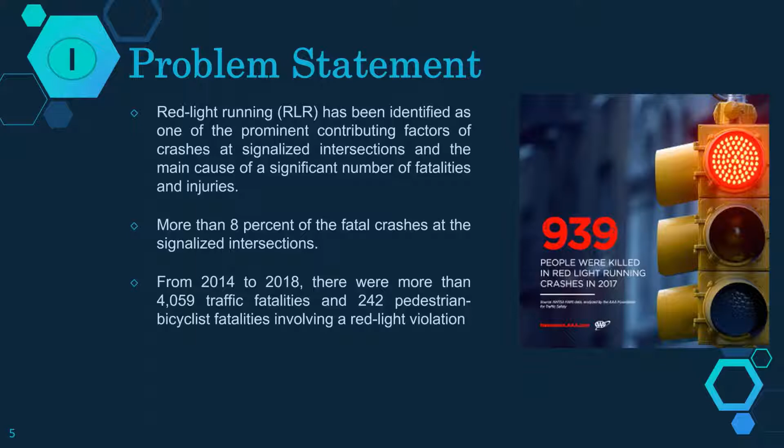One contributing factor to these crashes and violations is the existence of uncertainty as drivers approach what has been termed the dilemma zone. This zone is where drivers are uncertain whether to stop or advance to clear the intersection successfully during yellow light. Drivers' uncertainty in a dilemma zone may result in rear-end collisions because of sudden brakes, or red light running violations followed by right-angle collisions.

A potential solution to this problem, which is the focus of our study, is the connected vehicle red light violation warning application. This application is expected to reduce crashes between red light runners and cross traffic by increasing drivers' awareness of the signal status as they approach a signalized intersection, which will reduce the uncertainty in the driver's behavior, particularly in the vicinity of the dilemma zone.

So how does this application work? Basically, the vehicle onboard equipment of the red light violation warning application receives signal timing and map data from the roadside equipment. Combining this information with vehicle-specific information, such as speed and distance to the stop bar, the application assesses the probability of the driver violating an upcoming red light. According to this probability, the onboard equipment sends messages in the form of either advisory alerts or warnings to assist the driver in making the correct decision in the dilemma zone and avoid the red light.

In order to study the benefits of this application through simulation, correct calibration is key to accurate simulation. One main parameter in modeling and simulating the red light violation warning application is the driver's behavior in the dilemma zone, characterized by the probability of either stopping or going at the instance of the yellow light. So one main goal of our study is to calibrate this driver's behavior and showcase the impact of calibration on the validity of the red light violation warning simulation results.

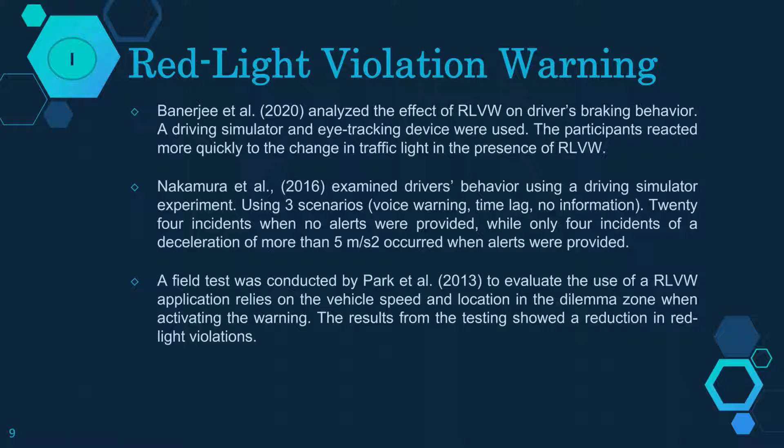Another type of study we looked into was real-world driver's behavior regarding the probability of stopping and the travel time to the intersection measured at the start of yellow time. There are a couple of studies on this particular topic, and the most recent one we found was done by Gates in 2007. This study basically updated the two models proposed by Sheffi and Mahmassani in 1981, and another study by van der Horst and Wilmink in 1986.

We will talk about what those parameters are. One of our objectives, as Kamar was saying, is to get the model ready to assess the safety impact or the mobility impact of the red light violation warning application, and then how we coded this red light violation warning application in the simulation.

So this is the logistic model in VISSIM. It determines the probability that a vehicle will stop at an amber light.

So in the driver behavior, particularly in signal control behavior, there's a behavior related to the amber indication, how the vehicle reacted to the onset of the yellow signal.

As you can see, there are three parameters here that we calibrated, which are alpha, beta 1, and beta 2, and two important variables in this logistic equation are the vehicle speed and also distance to the intersection measured from the vehicle.

So in short, by using the default values of these three parameters, alpha, beta 1, and beta 2, the resulting red light running violations will be 0. That's why this is also the first objective of the study, is that we want to calibrate these three parameters based on the real world probability of stopping data that we have.

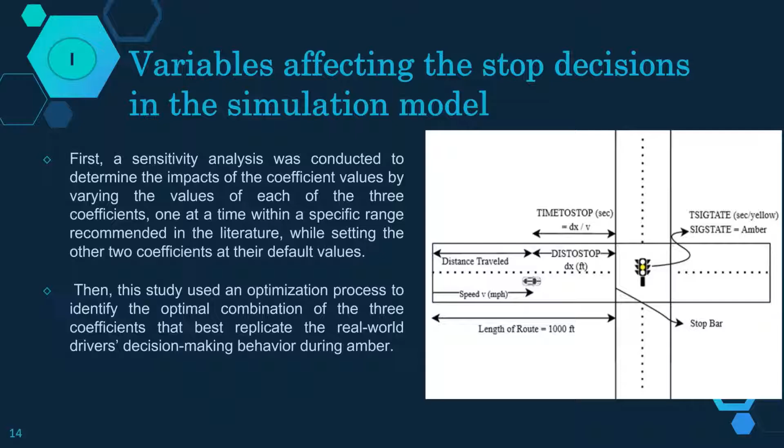It would be best if we have the local data available, but the purpose of this study is to show the framework of the calibration, how if one wants to assess the impact of this application, how can you start. This is the framework that we want to stand up. Next, please.

Again, basically we adopted the probability of stopping that was done by Gates study here. Next, please.

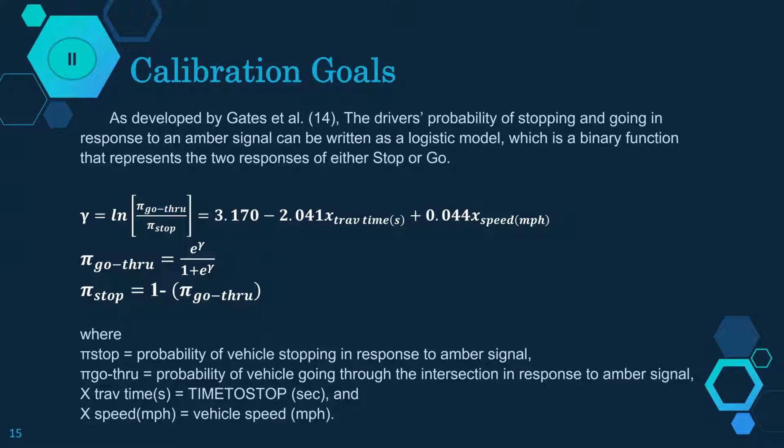Then, in order to find the best combination of those three parameters, we use nonlinear programming to optimize and solve the problem. Next, please.

And this is the algorithm that we coded in VISSIM. In short, basically this algorithm begins when it continues to check the signal status in VISSIM. In the real world, that would require SPaT data. So it begins when the remaining green time is less than 5 seconds.

This is just to make sure that some of the vehicles, if they are in the dilemma zone within 5 seconds, they can clear the intersection safely. And also if the remaining amber time is higher than 0, that means the current signal time is amber.

This application will check whether the vehicle is in the communication range. If yes, then the approaching speed and distance to the stop bar will be measured. Then the algorithm will compute the time to clear the intersection of the vehicle.

If the time to clear the intersection is higher than the remaining amber time, and also if that vehicle is in the dilemma zone, a warning message will be sent to that driver to notify them about the potential of running the red light.

Then Mahmoud will be talking about the results that we studied.

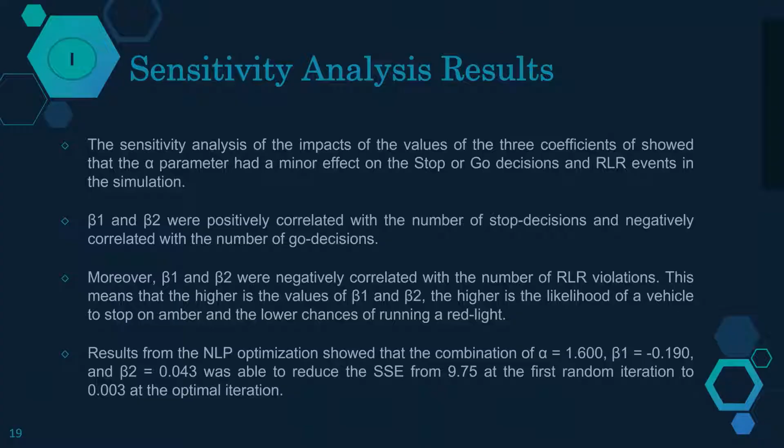After we obtained the combination of alpha, beta 1, and beta 2, we were able to reduce the sum square error from 9.75 to 0.003 at the optimal iteration. This means VISSIM was successfully able to simulate, nearly 99.7% accurately, a real world probability of drivers stopping on amber.

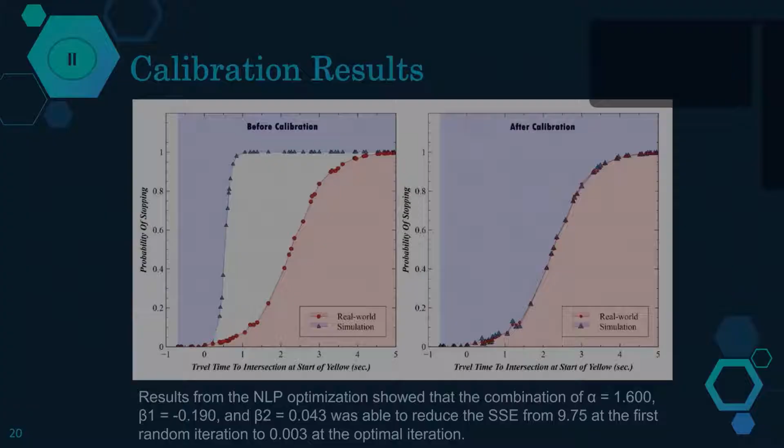So next, please, Kamar, could you go next? We used two surrogate safety measures: right angle conflicts and rear end conflicts, which are the two conflict types most highly impacted by a red light running application.

Those two types of crashes, right angle crashes and rear end crashes, are what we tested using the surrogate safety assessment.

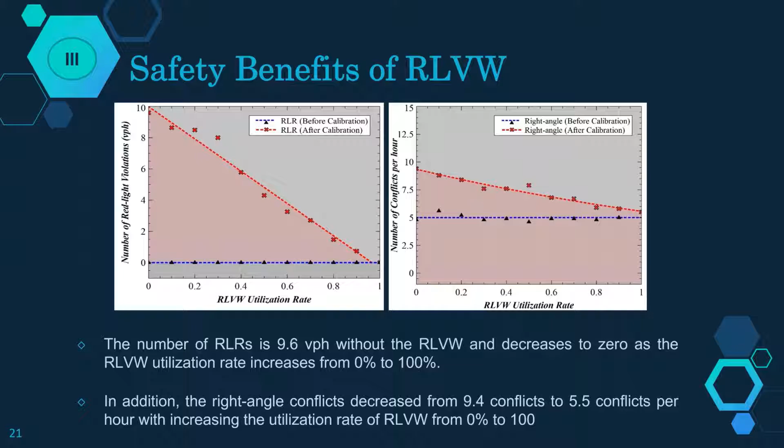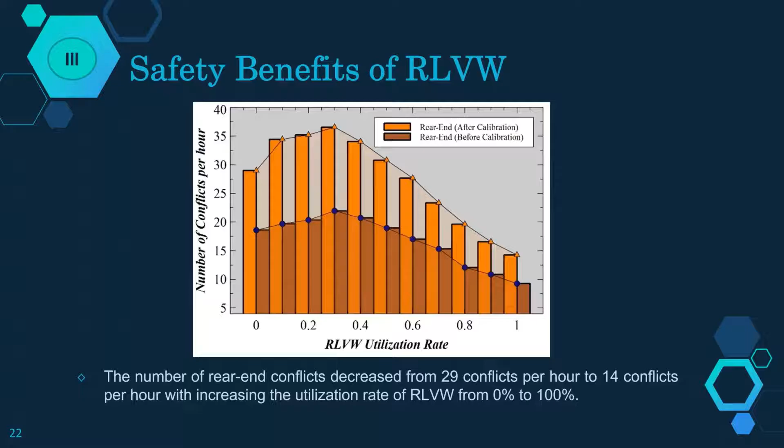With that, we'll turn to the next application: the stop sign gap assist application in a connected vehicle environment. I'll hand it to Kamar to introduce it. Thank you, Mahmoud. Similarly, I'll start with the problem statement.

A two-way stop-controlled intersection aims to improve traffic operations for the major street. Vehicles from the minor approach, who must yield to conflicting traffic, are allowed to enter the intersection once acceptable gaps are determined to be available by drivers on the minor approach.

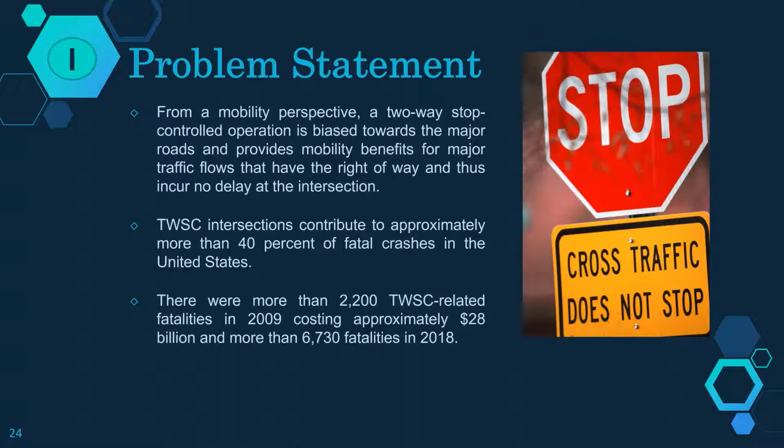However, two-way stop-controlled intersections contribute to more than 40% of fatal crashes. This is mainly attributed to drivers' misjudgment of the presence of a sufficient gap in conflicting traffic, failure to yield the right of way to the major road, and inadequate or obstructed sight distance.

A potential solution to this problem is the stop sign gap assist connected vehicle-based application. It is designed to provide assistance to drivers on a minor road and allow vehicles to safely traverse or enter a major approach.

This application supports drivers' crossing decisions by providing advisory messages, alerts, or warning messages to vehicles on the minor road with approaching vehicle information on the major road. Similar to other vehicle-to-infrastructure applications, previous studies reported that stop sign gap assist application can utilize two decision support interface alternatives: the driver infrastructure interface and in-vehicle interface.

The goal of our study is mainly to investigate the use of microscopic simulation models to quantify the potential benefits of a stop sign gap assist connected vehicle-based application, considering both mobility and safety impacts. We used VISSIM as a microscopic simulation tool to model the stop sign gap assist application and assess its impact on traffic performance at an unsignalized intersection.

Similarly to the red light violation warning application, we use the vehicle trajectories data output from VISSIM to evaluate the safety benefits based on the surrogate safety assessment model, which was also developed by FHWA.

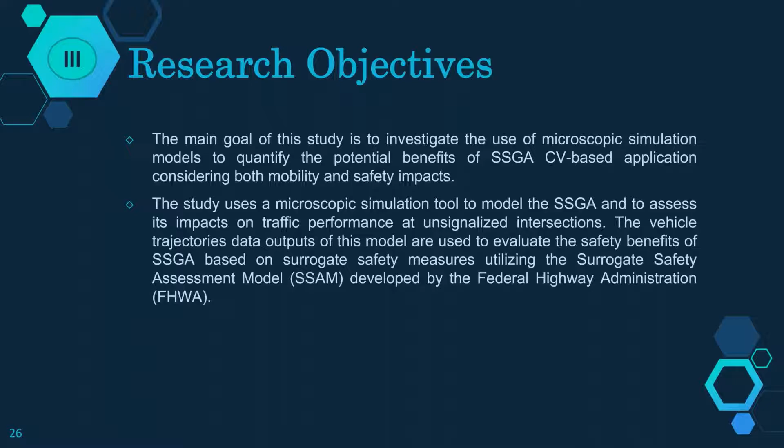Yes, sure. So the literature review that we went through was related to real-world drivers' behavior, particularly at stop control intersections, and also the previous studies on the assessment of the SSGA application. So, well, quickly that. Okay, next please.

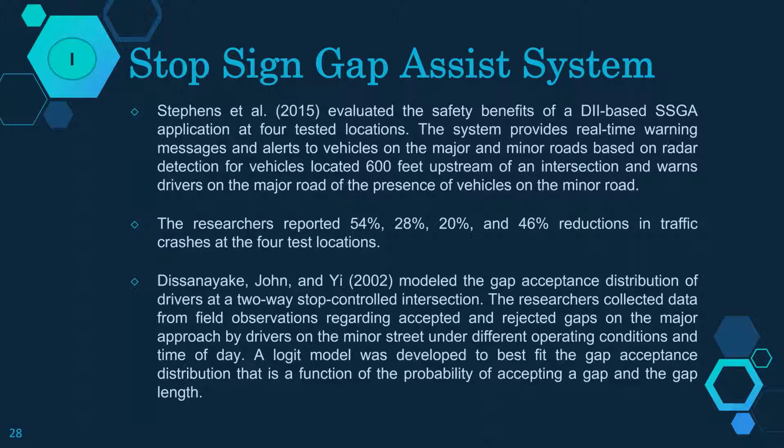This is the gap time distribution that was done by the study of Dissanayake, John, and Yi in 2002. Basically we adopted this model and then we calibrated this gap acceptance in VISSIM rather than using a constant value of gap time.

I think when one wants to assess the impact of this application, I mean SSGA, we want to see the importance of using this gap time distribution rather than a constant value. Next please.

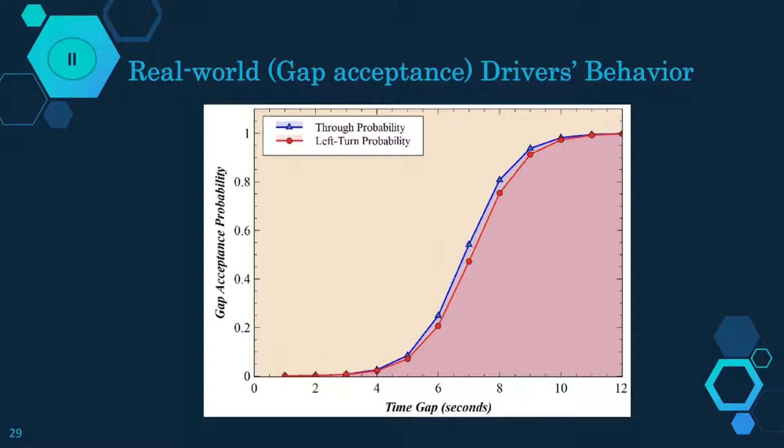So very quickly, next please. The intersection that we coded in VISSIM was a basic four-leg two-way stop control.

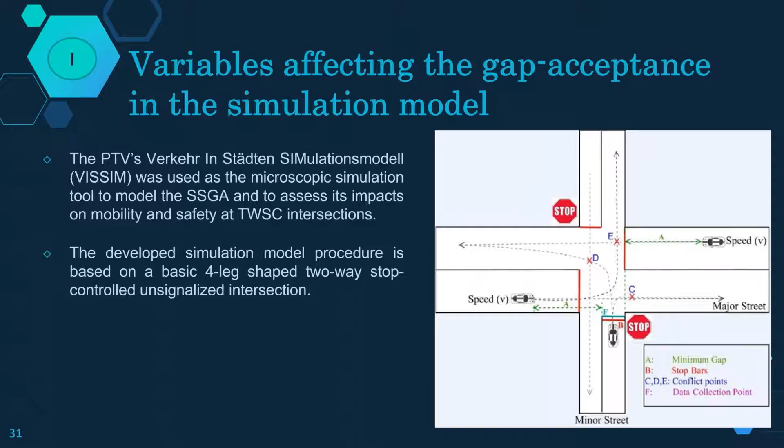And again, the model that we adopted was by this Ayanaki study. Next. Then this is the SSGA algorithm that we coded into VISSIM. Very quick, if anyone is interested, you can look at the paper because we're running out of time.

And then we further validated this model using the HCM, using the HCS software. As you could really see here, VISSIM is 100% able to replicate a real-world gap acceptance distribution. However, you need to model your correct parameters in the simulation. And going back again to the point that we started, VISSIM can give you a risk-free environment.

It can help transportation agencies in the pre-deployment and post-deployment of connected vehicles. You can use the simulation in a software-in-the-loop and hardware-in-the-loop setup. It gives you really a variety of scenarios that you can utilize the simulation package for. I don't want to sound like I'm making a commercial advertisement, but really I found the software very helpful in our studies.

So you could really see that before and after calibration, using the default 3 second gap time parameter in VISSIM, we overestimated the real world gap acceptance distribution. But once you input the distribution of the priority rules as a gap acceptance distribution instead of a constant parameter, you could achieve the real world driver's behavior.

This is the last slide. We will talk about the safety benefits of the application. We simulated the stop sign gap assist application, using 4.5 seconds as a design threshold that gives you an alert after a 4.5 second gap time, or 6 seconds, or 7 seconds, or 8 seconds. We modeled the 4 gap time thresholds in VISSIM, and we reported the safety benefits in terms of right angle conflicts.

You could really see that as the minimum gap time utilized in the simulation model increases, you will have fewer right angle conflicts. However, we found a trade-off. Here we are talking about two benefits of the application: safety benefits and mobility or capacity benefits.

If you input a time gap parameter less than 4.5 seconds, for example, you are releasing more vehicles into the intersection and creating more conflicts. However, you are increasing the capacity of the minor road. But if you increase the gap time parameter to 7 or 8 seconds, you improve the safety of the intersection, but you decrease the capacity on the minor road.

You could really see the number of right angle conflicts fluctuates from 11 to 16 conflicts when we used opposing traffic from 250 vehicles per hour to 500 vehicles per hour. However, once you have a higher flow rate of opposing traffic at 750 vehicles per hour, the number of conflicts increases with the utilization rate, again due to the assumption that more conservative drivers will utilize the service and use shorter gaps.

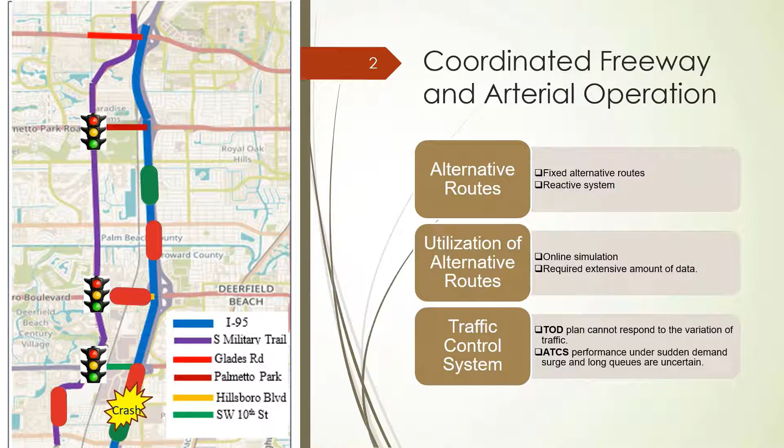Our solution includes basically three main methods. One is prediction of the scenarios on alternative routes - what kind of scenarios occur in alternative routes when traffic starts diverting, using machine learning and clustering analysis.

The second one is estimation of the effect of traffic demand on alternative routes. For this, we use multi-resolution modeling, which includes three parts: macroscopic, mesoscopic, and microscopic simulation modeling, to estimate the traffic demand on alternative routes.

Finally, after identifying the scenarios, for all the scenarios we developed a special signal plan so that it can address all these demands, while at the same time not deteriorating the overall performance of the network. To do this, we use multi-objective optimization, and here we use the VISSIM-COM interface to develop the signal plan.

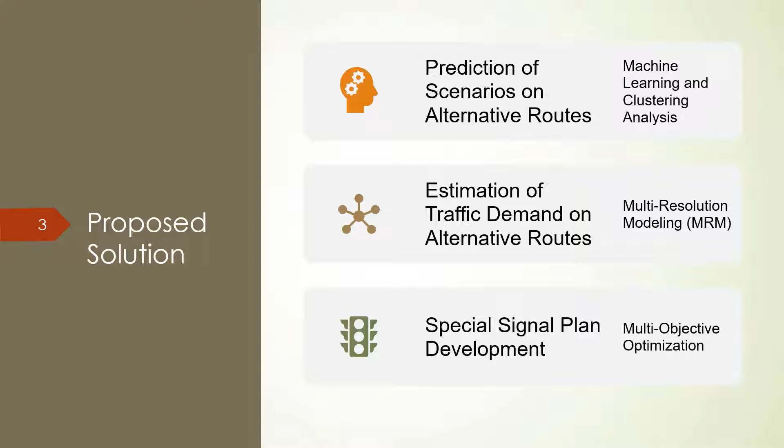One important aspect of our study is the multi-resolution modeling framework I previously mentioned. In this framework, we use Cube software, and then PTV VISSIM. In our case study in South Florida, the planning model was developed using the software Cube.

We developed this in Cube software. We need to extract the sub-area as well as the OD matrix from the planning model. Initially, for this sub-area and OD matrix, we ran the highway assignment module of Cube to get the OD matrix for this sub-area.

Thanks to the PTV group, PTV VISUM has the ability to import data from the Cube software. So after running the highway assignment module in Cube, we imported the OD matrix data and the network into the VISUM platform, the PTV VISUM platform, to run the mesoscopic simulation model.

We need the mesoscopic simulation model especially to address new features - the simulation-based assignment available in PTV VISUM. In VISUM we use simulation-based dynamic assignment because it has the ability to address dynamic phenomena in the network.

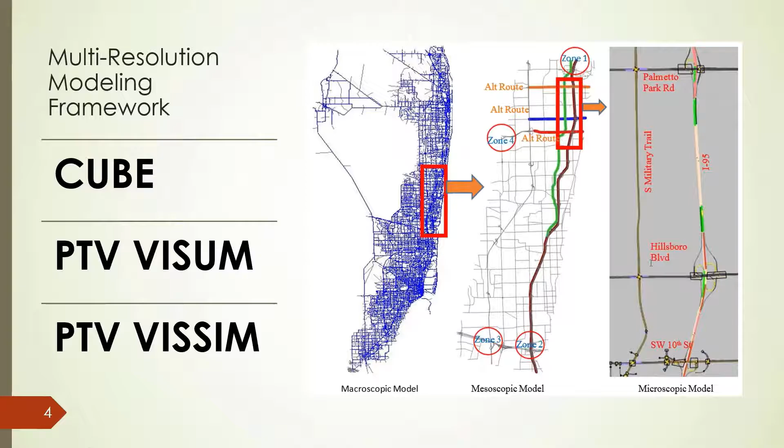So one of the challenging parts is the calibration of the SBA model, which we did for both the normal condition and the incident condition. For both conditions, we use data from the street light data for the OD path-based traffic, as well as the travel time for both normal and incident conditions. We also calculated the reduced traffic count data and the turning data.

After getting all this data, we calibrated the SBA model for the normal condition using the criteria set by the Federal Highway Administration, which requires traffic count and travel time error to be less than 15%. When we saw this criteria was met for the normal condition, we then calibrated the model for the incident condition.

For the incident condition, we put in the lane blockage and incident duration on the freeway, so that traffic starts diverting. To do this in SBA, it's not possible to directly reduce the capacity, so we use the time headway, critical gap time, and reaction time, changing these so that the capacity comes as close as possible to the HCM capacity for different incident conditions, like 1 lane blockage or 2 lane blockage, comparing it to the HCM.

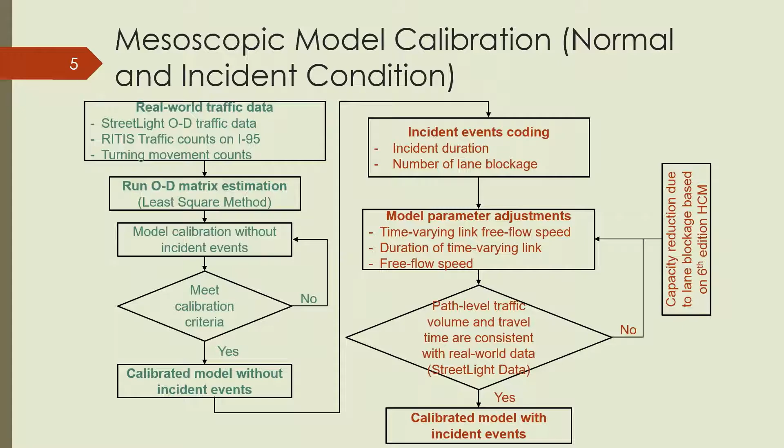After calibrating this model against the HCM, we ran the different scenarios. We came up with 11 scenarios total, but overall we developed the signal plan for 5 of those scenarios.

In the calibration results, this result is for the incident condition. You can see these 3 routes, which are very important for the diversion. For the travel time on these routes, it's less than 10%, meeting the criteria. For traffic counts, for the 2 to 3 lane blockage case, it's a bit higher than 15%, around 16%. But for all other cases, it satisfies the criteria.

After doing this calibration, we ran the DTA and got the route-level traffic demand for the different scenarios, then imported it into VISSIM for optimizing the signal plan.

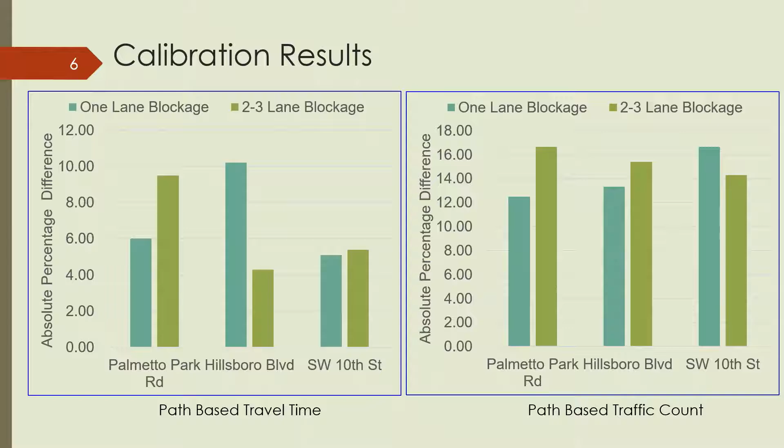For optimizing the signal plan in VISSIM, we used multi-objective optimization, and our main goal was to minimize the delay and maximize the throughput, both in the network and in the diversion route. So we try to minimize delay while also maximizing throughput in the network.

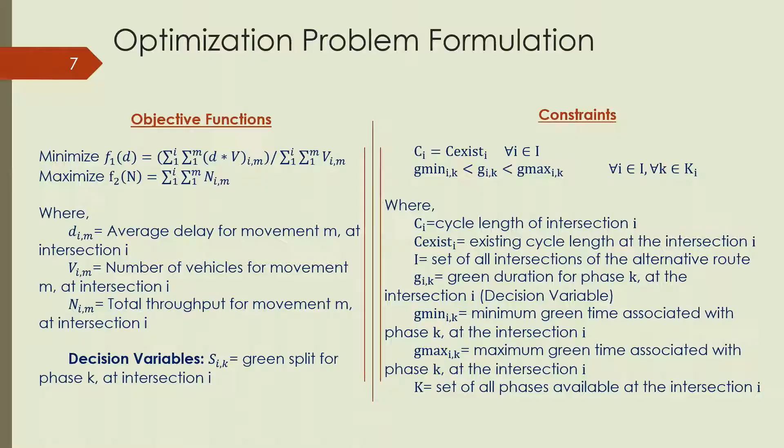For different signal plans, to solve this optimization problem, we used the NSGA-II multi-objective optimization algorithm, which is a variation of GA, the genetic algorithm. We used this algorithm together with the VISSIM-COM interface.

What we did was write the algorithm separately and run it through the COM interface to access the VISSIM simulation. After running the algorithm, that data was put back into VISSIM, which ran the simulation, and then we got the output from VISSIM and put it back into the algorithm again. So it's like a loop, and we continued this until our criteria were met.

After doing this optimization in VISSIM, we finally developed our plan. The results I showed are for the 5 scenarios, but overall, from our clustering analysis, we found there are 11 scenarios in total.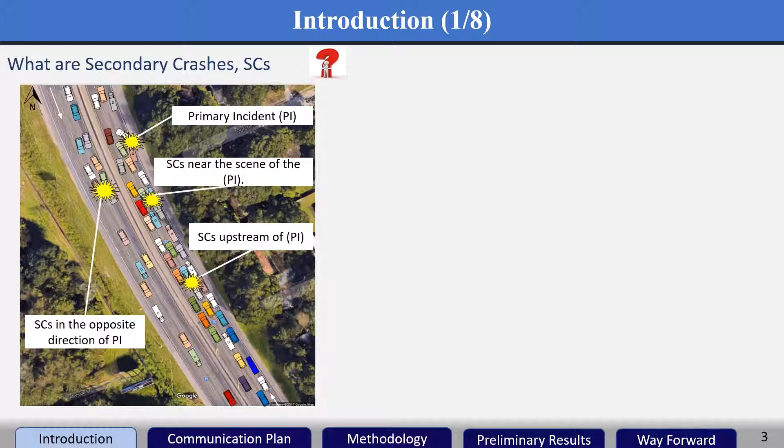So what are secondary crashes? Secondary crashes can simply be defined as any incident that is an outcome of a prior incident within the same vicinity of the prior incident. Secondary crashes can also occur on opposite traffic due to the rubbernecking phenomenon.

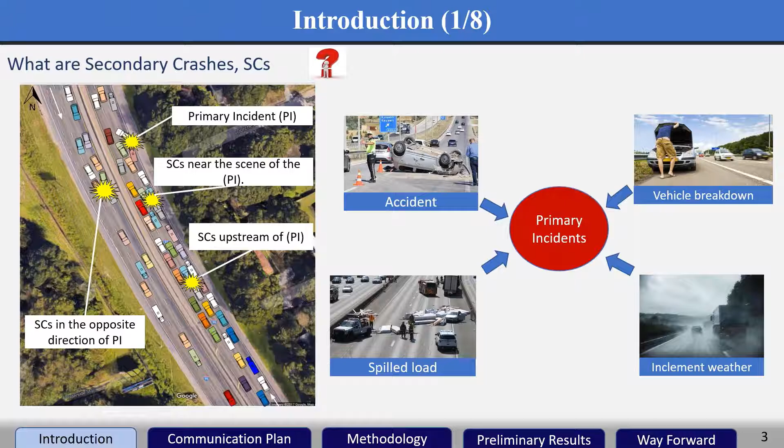Various road incidents may cause the occurrence of secondary crashes, such as road accidents, vehicle breakdown, spilled load or debris, and inclement weather.

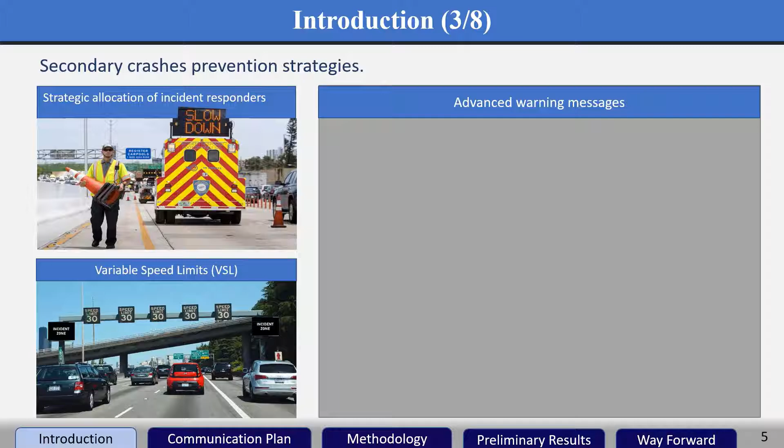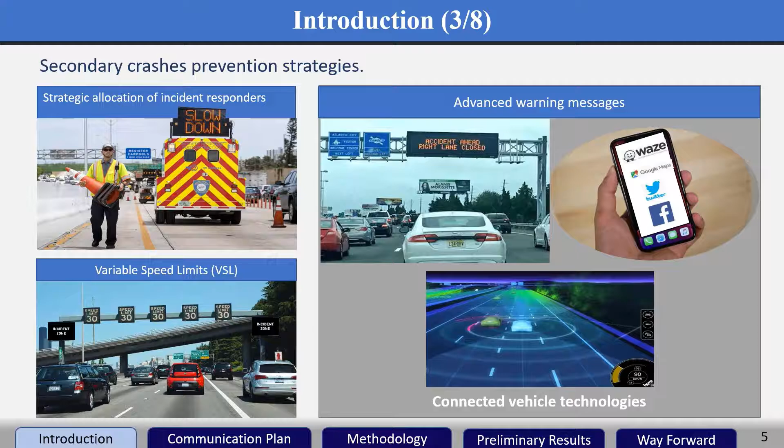Traffic incident management agencies have considered different strategies to prevent the occurrence of secondary crashes. For instance, strategic allocation of incident responders to hotspot locations, the use of variable speed limits, and advanced warning messages. Here you can see things like dynamic message signs and smartphone applications, also connected vehicle technologies, because these can disseminate incident warnings while at the same time suggesting the best actions for drivers to take.

So to mitigate secondary crashes, this is a time-sensitive process. If the crash has occurred, you have to be very quick to disseminate that information to upstream drivers so that you can prevent them from experiencing another accident as an outcome of the primary incident.

But with the methods I've mentioned before, there is a lapse of time between when the incident occurred and when upstream drivers get the information. This lapse of time may increase the likelihood of secondary crashes. On the other hand, the use of smartphone applications and connected vehicle technologies have potential to disseminate traffic information in real time, more quickly.

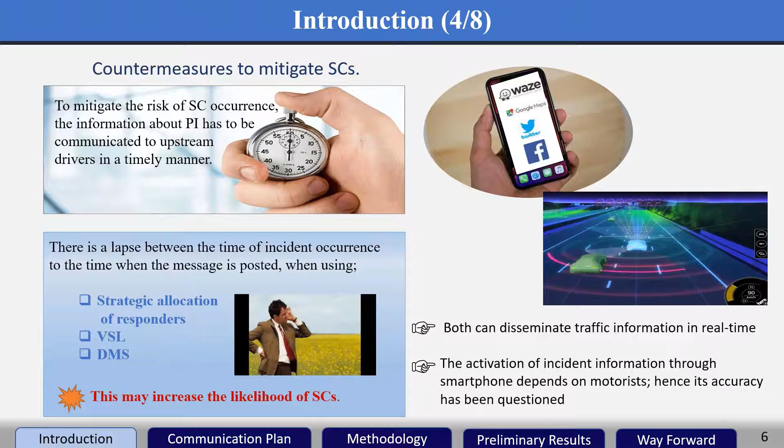So having seen the challenges of the aforementioned strategies, let's look at connected vehicle technologies. Connected vehicle technology, as we know, is just enhanced capabilities of vehicle-to-vehicle communication and vehicle-to-infrastructure communication.

Unlike other strategies, this technology has potential for slashing the delay in disseminating advanced messages to drivers when an incident occurs, through automatic incident detection and quick dissemination of incident-related information, which can help slash the delay in relaying information.

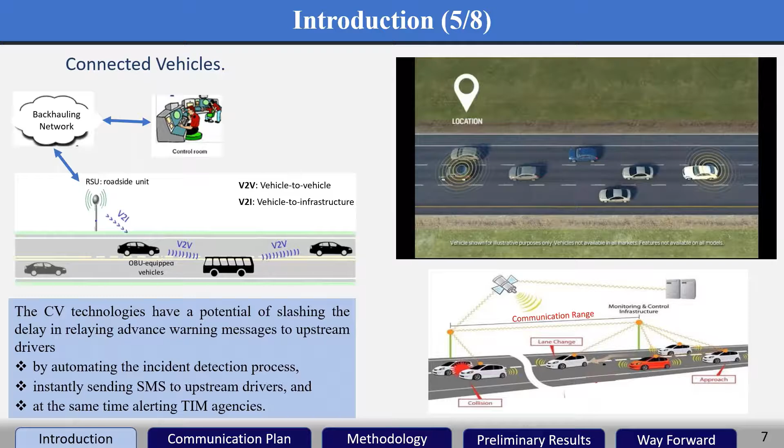This video clip shows an example of vehicle information that can be shared in a CV environment, including location, speed, direction, and advisory messages. This can be useful in mitigating secondary crashes by sending a notification, such as hard braking ahead, where a driver can reduce his or her speed, possibly to avoid the crash ahead.

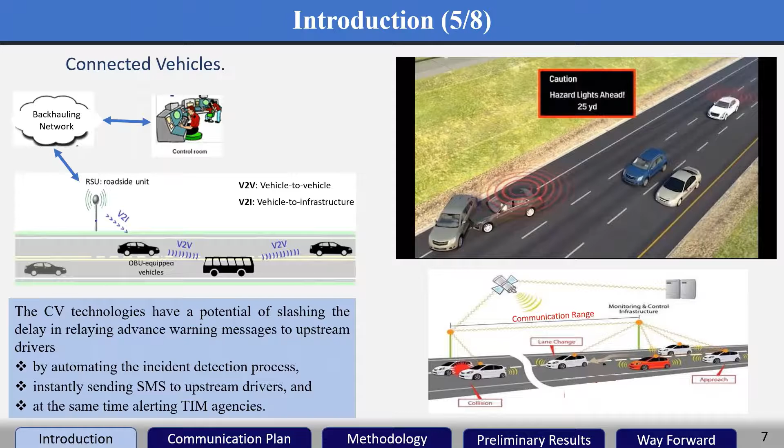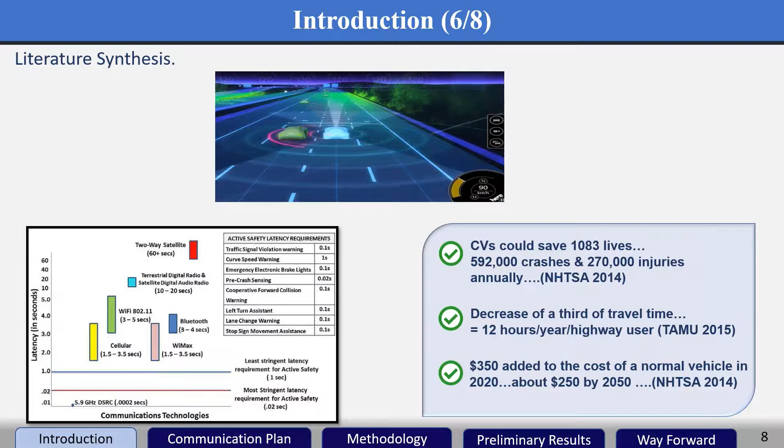Safety analysis observational models depend on historical crash data to assess the safety of a facility. On the other hand, we can use surrogate safety measures, such as traffic conflict analysis and microscopic simulations, as an alternative approach to observational models in situations where crash data are limited, or when evaluating the potential safety benefits of certain modifications before their implementation, for instance, CV deployment.

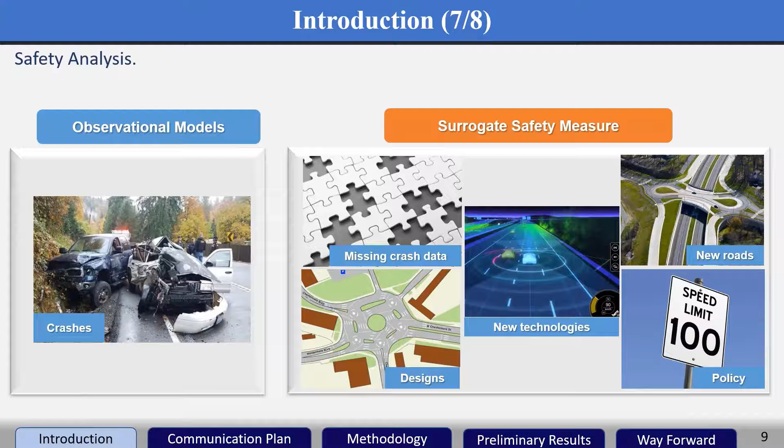So this is the main objective of my study: to quantify potential benefits of CV technologies at varying market penetration rates in mitigation of secondary crashes. Here I use traffic conflict analysis as a surrogate measure for secondary crashes.

So I have a communication plan that is needed for proper and efficient relaying of this primary incident information. This communication plan will reduce the risk of secondary crashes.

As we know, after incident occurrence, there should be incident detection, incident verification, and processing of information and advisory messages that need to be disseminated all the way to other motorists. This can be done through DMS and connected vehicle technology.

So I just used connected vehicle technology. As I showed you in the last slide, there are a couple of means to disseminate information, but in my case, I don't want to use DMS—I'm going to use CV.

Under a CV environment, information can be conveyed from detection all the way to motorists approaching the scene. This shows the potential of connected vehicle communication to quickly disseminate incident-related information, therefore reducing the likelihood of occurrence of secondary crashes.

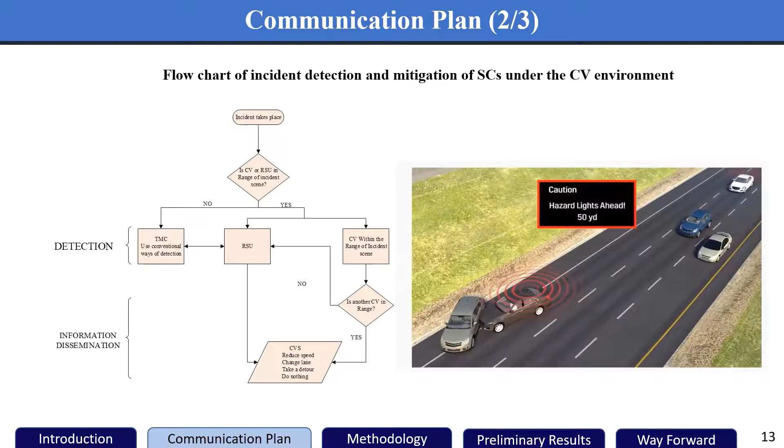This figure shows the algorithm that I developed, which was used to process advisory messages to be disseminated to motorists during an incident period. The algorithm's objective was to provide speed, lane change, and/or detour advisory messages to drivers upstream of an incident location, with the target of mitigating the occurrence of secondary crashes.

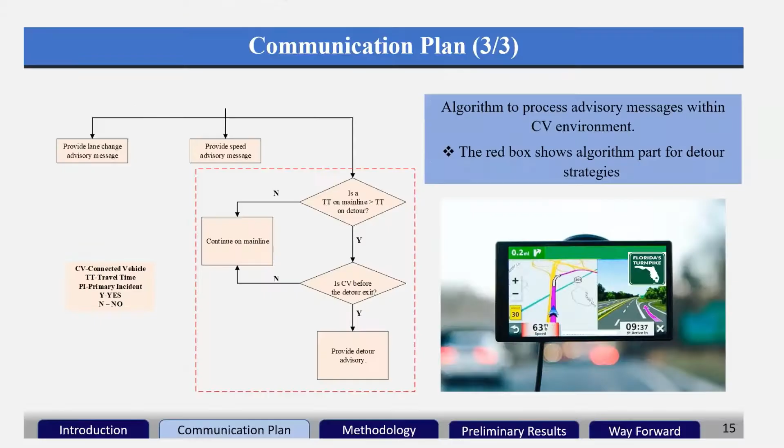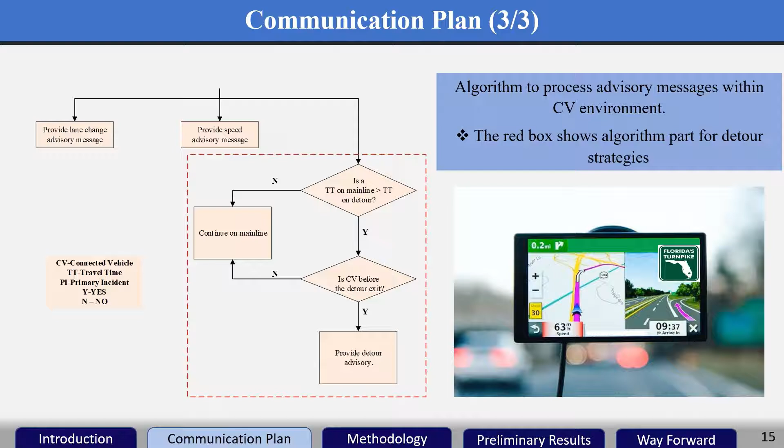The algorithm requires traffic parameters as input to come up with an appropriate advisory message. The red box here—this part of the algorithm—was used to enhance the detour advisory. Travel time was used as the performance measure, comparing travel time along the main route and the detour. Whenever the travel time along the detour was shorter compared to the main route, the connected vehicles were advised to consider that detour route.

So here's my methodology.

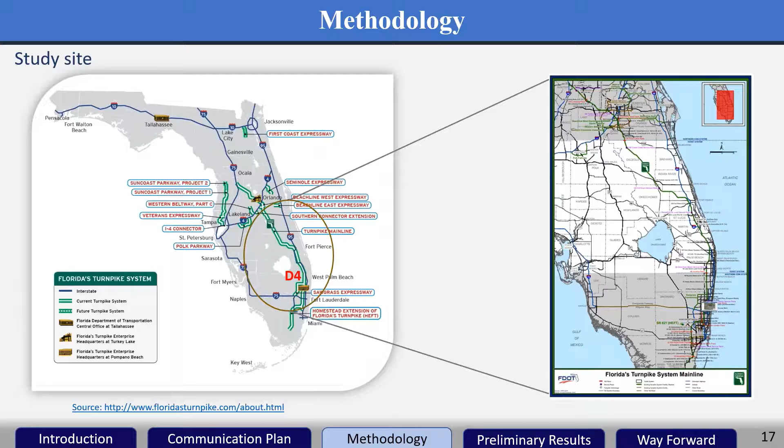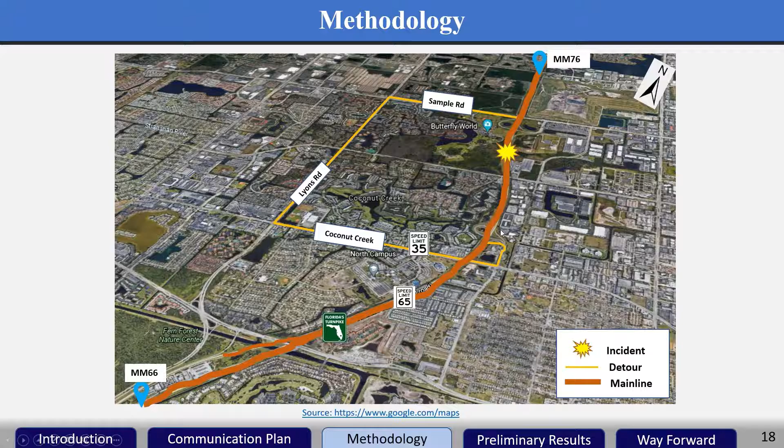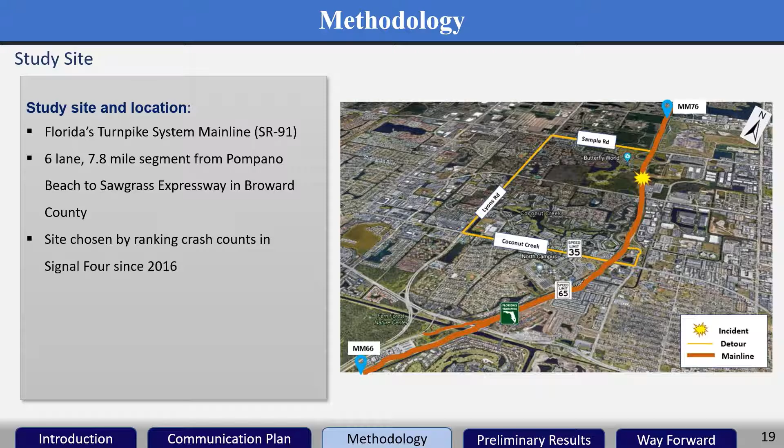My network was six lane, 3 lanes in each direction, about an 8-mile segment. The site was chosen along the Florida Turnpike network because of the crash count experienced since 2016. The detour is Lyons Road, which has 4 lanes and is about 4 miles long, used to divert traffic all the way to Lyons Road and back to the Turnpike network.

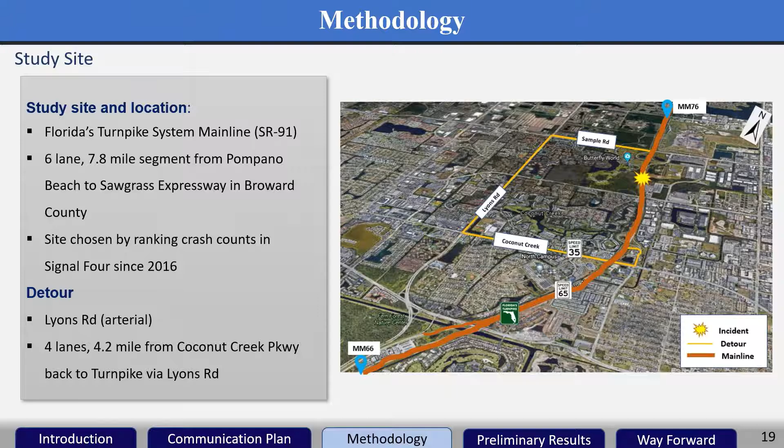This is the general flow of my study. I won't go through every stage because of time. The first thing was to create and calibrate the VISSIM network model and to model the primary incident. I'll show in the next slide how I did some of these stages.

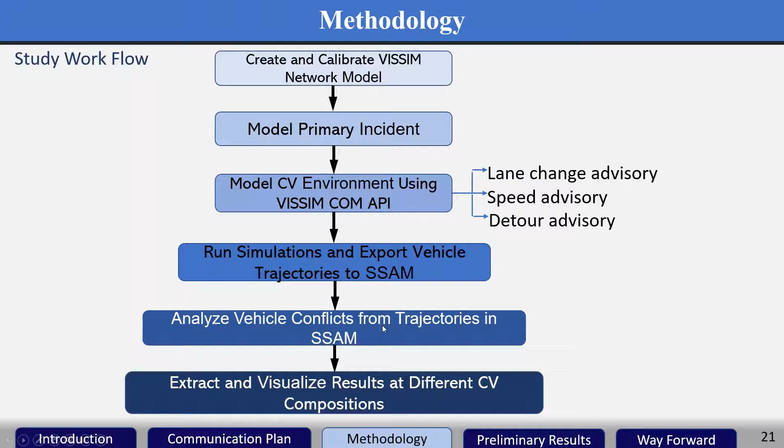These are some of the scenarios considered in my study. They were considered to account for the effect of traffic volume, so I had AM pre-peak, post-peak, and peak periods. I also varied the CV penetration rates and modeled the incident in the outer lane and inner lane, to vary the situation of the primary incident and see the effect on the occurrence of secondary crashes.

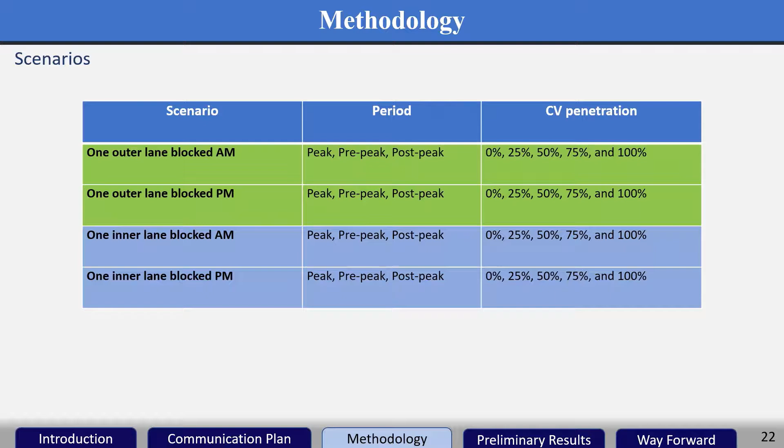The study leveraged CV applications, and these are the advisory messages considered: lane change advisory, warning, detour advisory, and speed advisory. These are the kinds of advisory messages considered in the vehicle-to-infrastructure communication along the selected corridor.

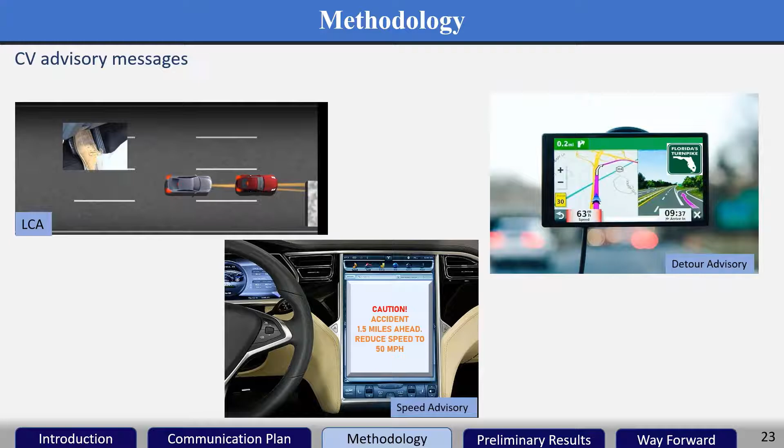Here you can see VISSIM's capabilities. VISSIM has several customizable features, as we know, and it provides add-on application APIs such as COM, which gives users the capability to incorporate their own applications. In this study, the COM API was used to access vehicle attributes and integrate CV applications during runtime. We had a few assumptions: 100% compliance rate, no data loss, and only northbound traffic was considered during this study.

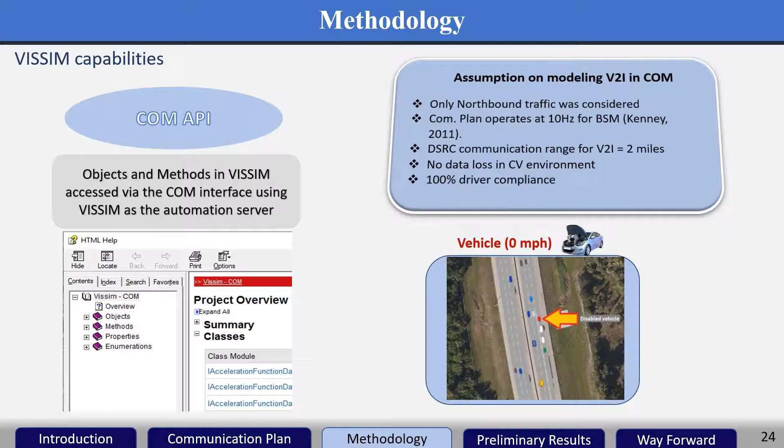For modeling the incident, we used a function to add a vehicle at a link at a certain time and position with a 0 speed limit, to mimic the lane blockage. This acted as the primary incident to block the lane. Depending on whether I wanted to analyze the outer lane or inner lane blockage, I applied this function to introduce the lane blockage.

The RSU functionality was applied in my simulation environment through a GetByLocation function. This was used to retrieve vehicle data, and after processing that information to be disseminated to upstream vehicles, the vehicles within range received the processed message through this GetByLocation function. Every vehicle within range received the processed message respective to their location relative to the incident location.

Here we used the event-based script. I used this VB code to replicate the communication plan I discussed before, and the CV applications, to manipulate driver behaviors to increase their safety, leading to real-time changes in vehicle parameters during runtime.

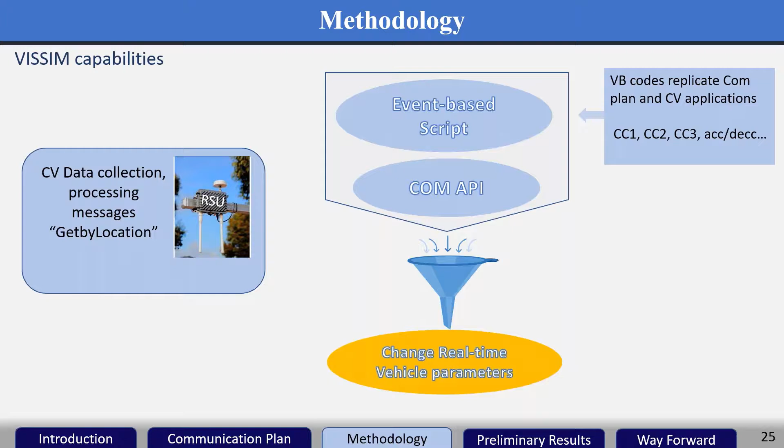Let me go quickly through the study framework. The motivation of this study was to mitigate secondary crashes. We derived the study concept and then developed a communication plan for how we can relay information from the primary incident all the way to upstream or upcoming vehicles approaching the incident scene.

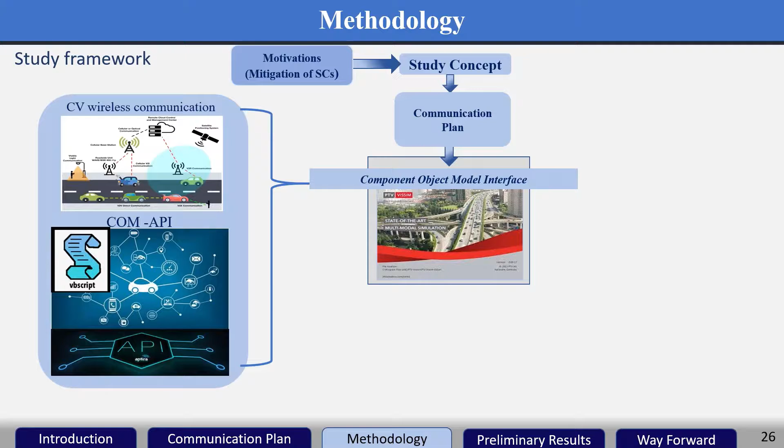We used the COM API to simulate CV wireless communication in the VISSIM interface, and we ran a couple of scenarios there. Safety analysis was done using SSAM, where I used post-encroachment time as well as time to collision as thresholds, surrogate measures to define the possibility of conflicts. We obtained conflicts as rear-end and lane-change conflicts, which was the output of our safety analysis stage.

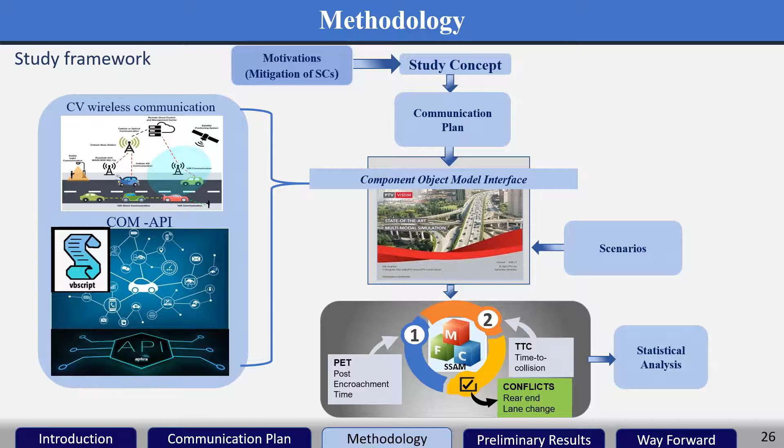Statistical analysis was done finally to check the significance of changing CV market penetration on reducing conflicts.

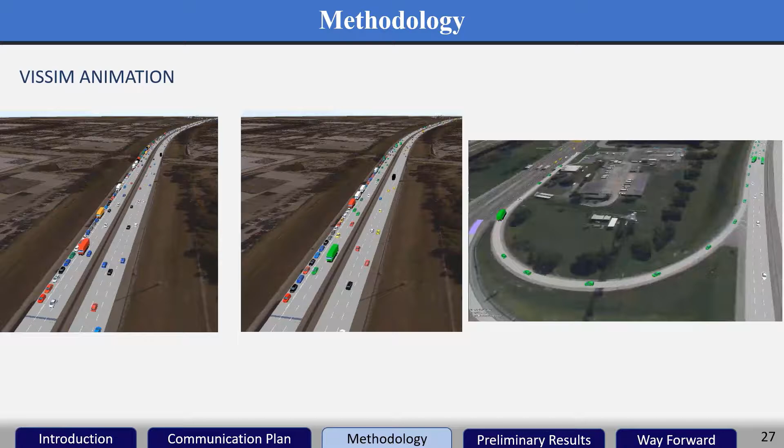So these are some videos here, just to show the way. The green vehicles there are the connected vehicles. Whenever I increase the penetration rate, I'll have more green vehicles in there. They can take a lane change, reduce their speed, or take a detour. I don't think you can see that clearly, but those are the kind of messages I was advising CVs along my network to consider.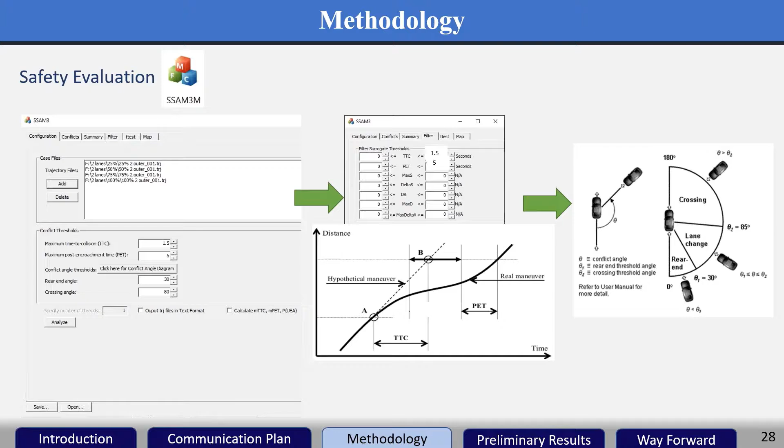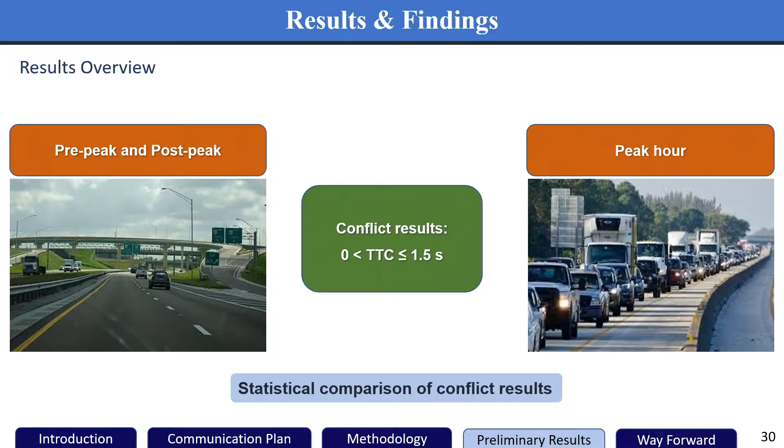So quickly, let me go to results and findings. We had a pre-peak and post-peak, which reflected the lower traffic volume period, and a peak period, which reflected a higher congested period.

So during the AM period, these are the results. Quickly, these are the number of conflicts against the CV penetration rate, representing when the inner lane was blocked and when the outer lane was blocked. The introduction of CV reduced the number of conflicts, and as the market penetration of CVs increased, there was a relative decrease in the number of conflicts.

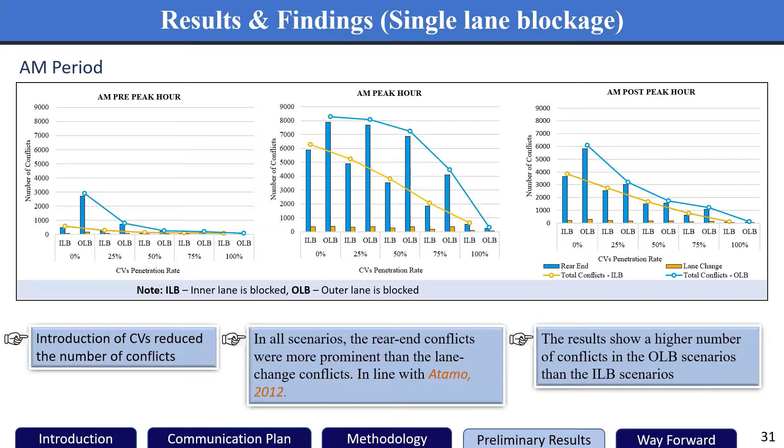In all scenarios, the rear end conflicts were more prominent than the lane change conflicts. The results show a higher number of conflicts in the outer lane blockage scenarios than the inner lane blockage scenario, because of the weaving, merging, and diverging maneuvers close to the incident location we selected in our study. So when the outer lane was blocked, we experienced a lot more conflicts than when it was the inner lane.

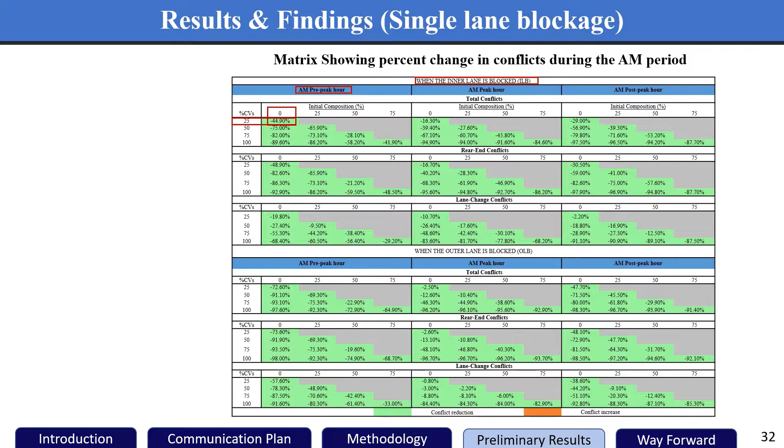So this is the matrix showing the relative decrease in conflicts as CV penetration increased. You can see a high penetration of CV is required to achieve more conflict reduction during the peak hour, while with only 25% CV penetration, you can see a vast conflict reduction during the less congested periods, like pre-peak and post-peak hour. The reduction in lane change conflicts was relatively small compared to the reduction in rear end conflicts.

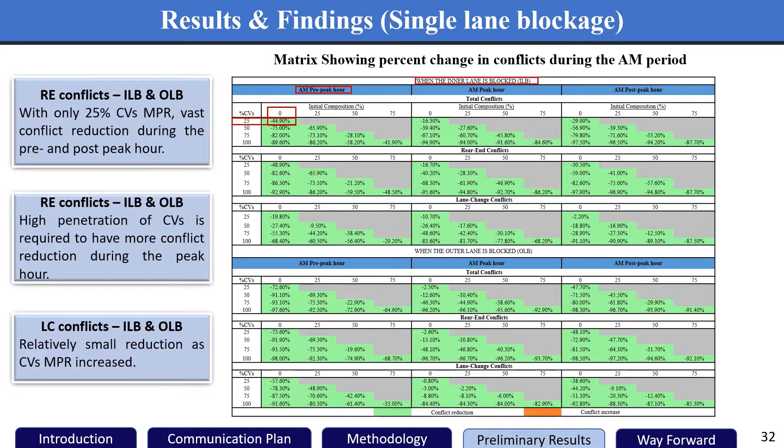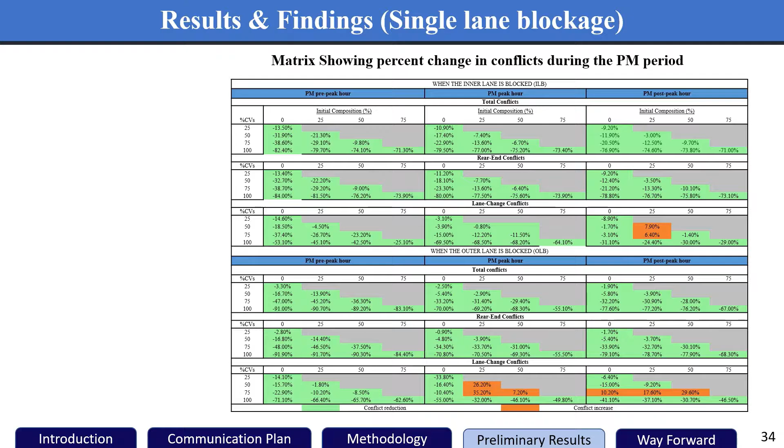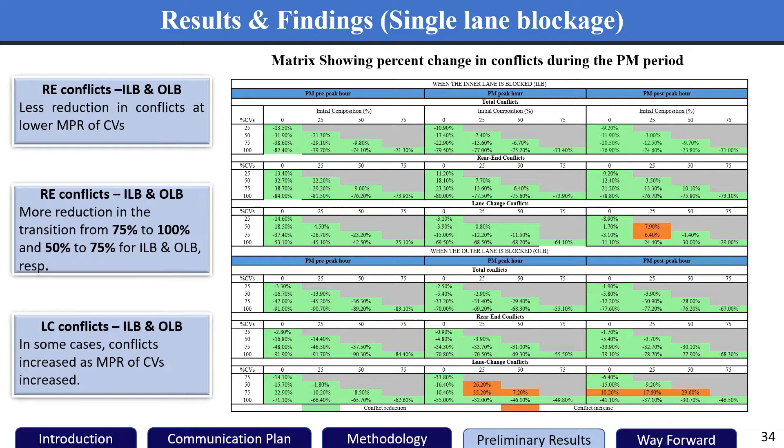So during the PM period, we had more conflicts than the AM period, because this period was more congested, but again there was a relative decrease in conflicts as CV penetration increased. In the matrix here, it shows the same pattern as the previous slide for the AM peak period, and here a higher market penetration was required to achieve significant reduction.

Quickly, the statistical analysis showed that for all periods there was significance. I used the one-tailed t-test to see if there was significant reduction between scenarios after increasing the CV market penetration, and the results from that statistical analysis show that in all periods, significant reduction occurred, even for every 25% increment of CV composition.

And for AM peak, PM peak, and post peak, which were the highly congested periods, when the outer lane was blocked, there was significant reduction observed beyond 50% CV composition. And for the same period, for both the outer lane blockage and the inner lane blockage, significant reduction was observed beyond 50% of CV penetration.

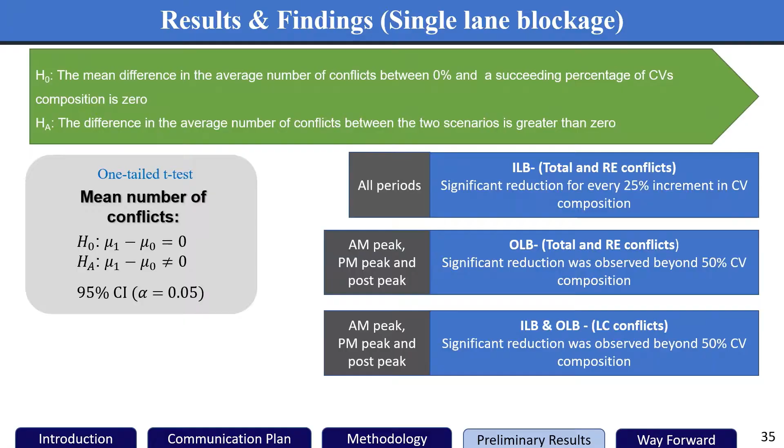So the conclusion: more conflict reduction, up to 98% from the matrix, was seen to occur during the lower traffic volume period with full penetration, and 50% conflict reduction at 25% penetration of CV during the lower traffic period.

Another finding was that for congested scenarios, high composition of CVs is required to achieve significant benefit, according to the statistical analysis. Up to 33% reduction occurred with 75% penetration for the congested period. So many more conflicts were observed when the outermost lane was blocked compared to when the innermost lane was blocked.

So these are some of the recommendations for future study: to see the effect of driver compliance, and to investigate the effect of data loss on signal propagation in the CV environment.